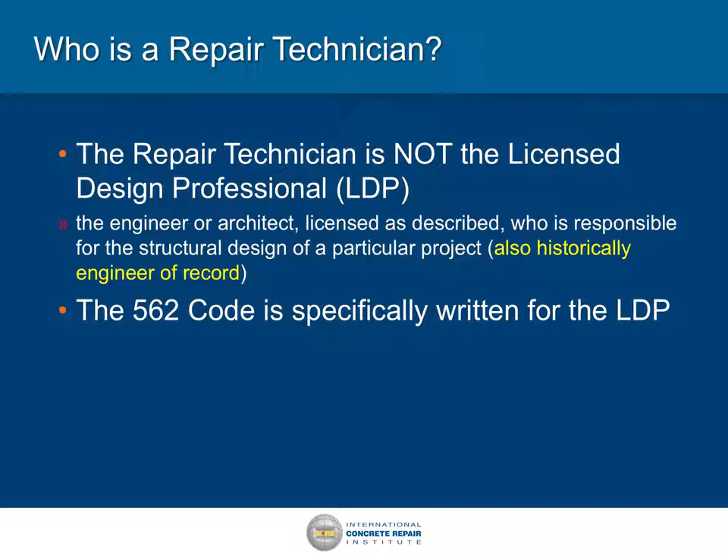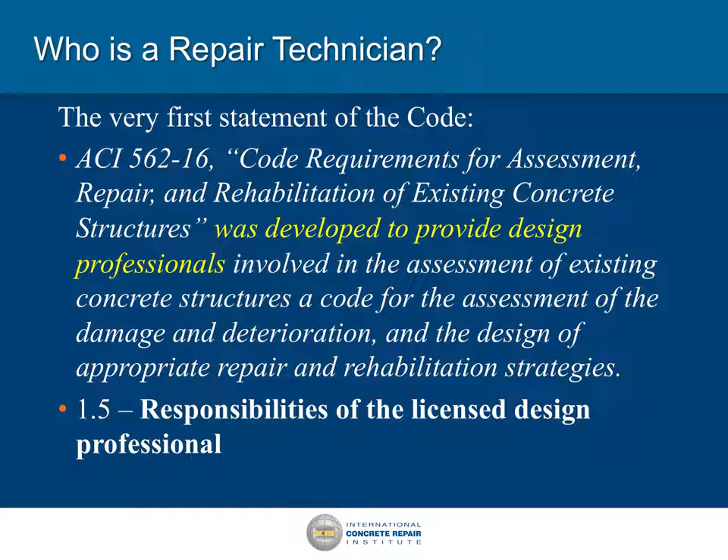In the code, just to reiterate what I said, in the very first page of the code, it specifically says that this code was to provide the design professionals guidance, not us as the repair people. So let's go farther. It also talks about the responsibility of the licensed design professional. I'll just go really quickly on what that is. It goes through all the listing of the licensed design professional. You see nothing in here about the construction and the quality assurance person.

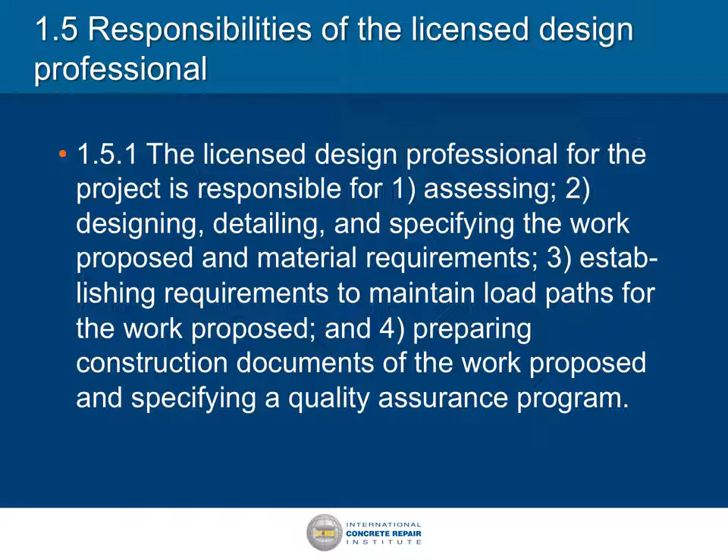So the commentary goes into it and says the quality of concrete repairs is largely dependent upon the workmanship during construction. So we're starting to see language in the code telling us why we've got to go here. And of course, it also says inspection is necessary to verify repairs and rehabilitation work are completed. Here again, just like in new construction, you wouldn't do new construction without quality assurance testing. So the commentary of the code is already guiding us towards the need for quality assurance.

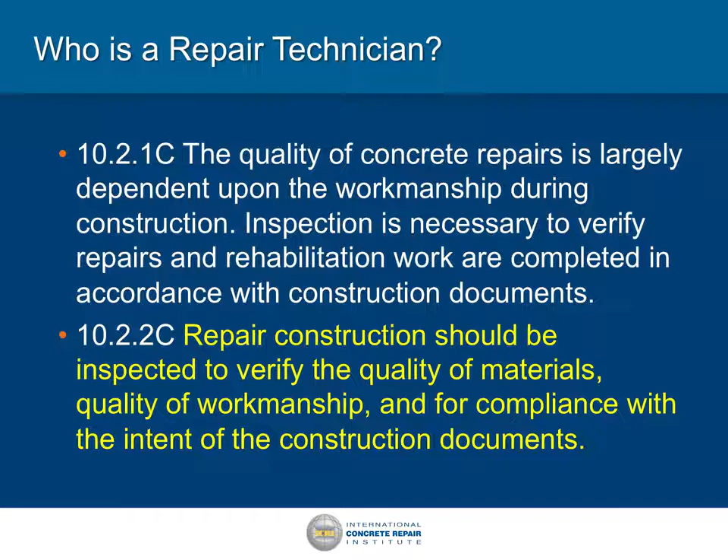So let's get a real definition of who the repair technician is. He or she is the qualified person to inspect the quality of the work. That's the person we're talking about. From the owner's side, that's the quality assurance inspector. From the contractor side, it's the quality control person. From the ACI-562 side, it's actually both of you. That's the certified person qualified to do the inspection. That's where we're going here.

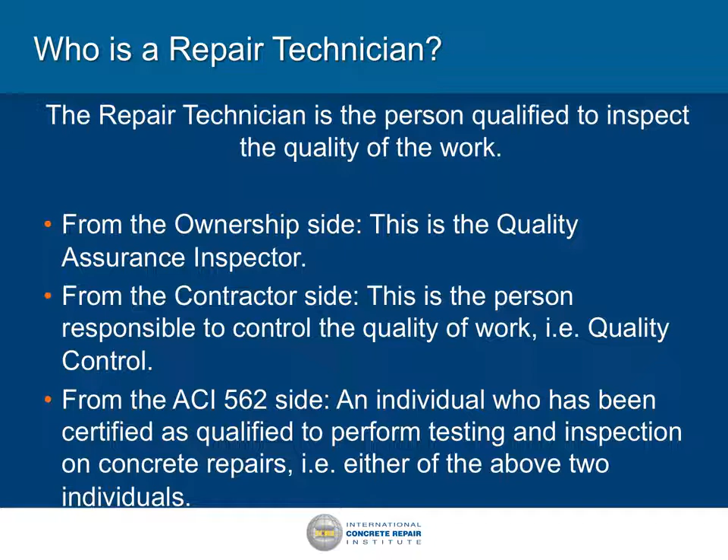Let's talk about the knowledge that the repair technician has to have. What does that individual need to know? We'll take a look at some examples. First, condition assessment—there's methods of assessment. The repair technician has to know the different methods. You're going to do a chain drag, you're going to do non-destructive testing, you're going to do other things. That's important to know. There's the chain drag—it has an ASTM standard. Still have to be familiar with it if you're going to do it correctly.

We have exploratory removal. All of us know how to take concrete out with jackhammers, but that's part of condition assessment. We have impact echo. How many here know impact echo? It's a technique, an important one. We have impulse response—I'm sure there'd be fewer hands for that. Thermography is a technique.

Now let's take a look at what the code says about it. In the commentary, it says the primary purpose of construction observation is to verify the exposed existing construction is as assumed in the design, and that the work detailed in the contract documents will fulfill the design intent. So that means this repair technician has to understand that—has to be knowledgeable about the design, why the design is being done, and what's being repaired. So the code is now talking to you as the repair technician.

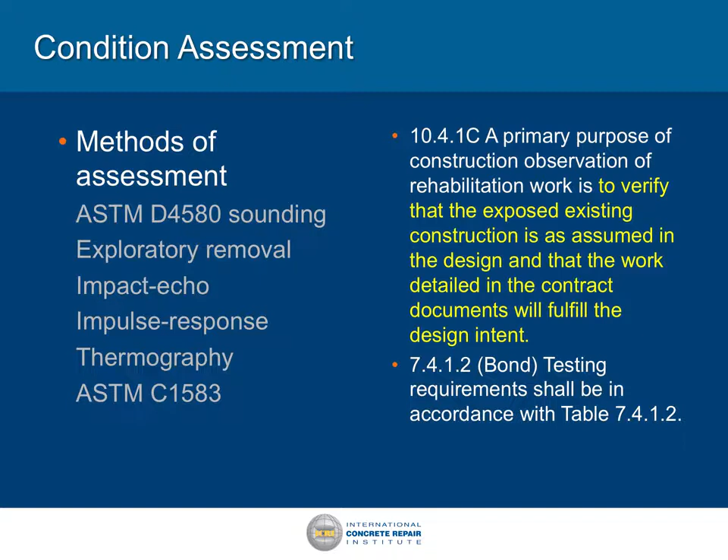Bond—as Keith said, bond is a primary thing. Just think of this: virtually everything we do in the repair world is related to bond. Everything. You do a surface repair, a vertical repair, an overhead repair, you do FRP—everything is related to bond. So the repair technician has to understand bond, and I'll talk a little bit more about it later, and has to understand ASTM C1583 for the bond testing. We'll talk some more about those later. All right, causes of the concrete deterioration.

There's embedded metal corrosion. I'm sure everybody would raise their hand if they understand embedded metal corrosion. But there's some other things: freeze-thaw damage, erosion and abrasion. One must understand these if one is going to be fixing it or inspecting the quality of the repair for that. Disintegration of concrete - what are the mechanisms that cause concrete to disintegrate?

Let's see what the code says about it. In section 1.7.4, I highlighted in yellow the effects of material deterioration and other deficiencies. Now that's talking to the licensed design professional, but it's also talking to the repair technician. You must understand this. If you don't understand it, you're not going to be understanding the repair. The knowledge of why a repair is being performed is absolutely imperative for understanding what's to be repaired.

What is being repaired in this building? How is it going on? So if you have that knowledge, you have the ability to observe if a repair is being completed correctly. That's the primary piece right here.

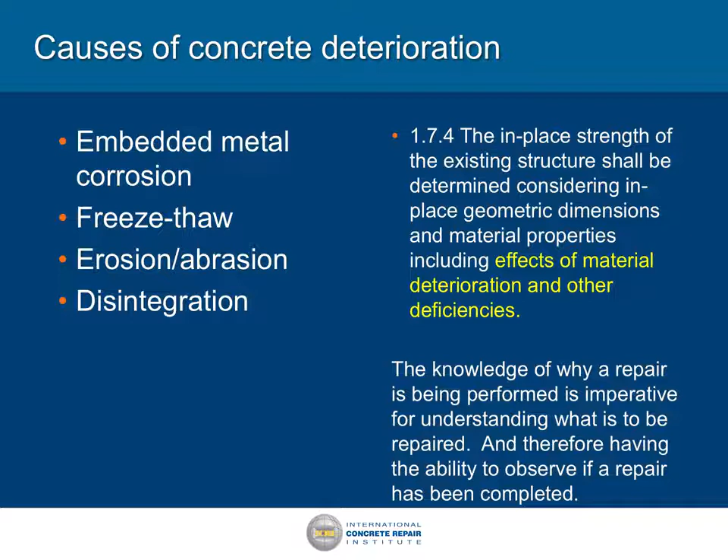Carbonation and chloride contamination - I assume you all know that chlorides are going to be detrimental, but you must understand that as the repair technician. So corrosion of the reinforcing steel can be initiated by either of those two. That's a whole seminar by itself, but the repair technician has to understand that.

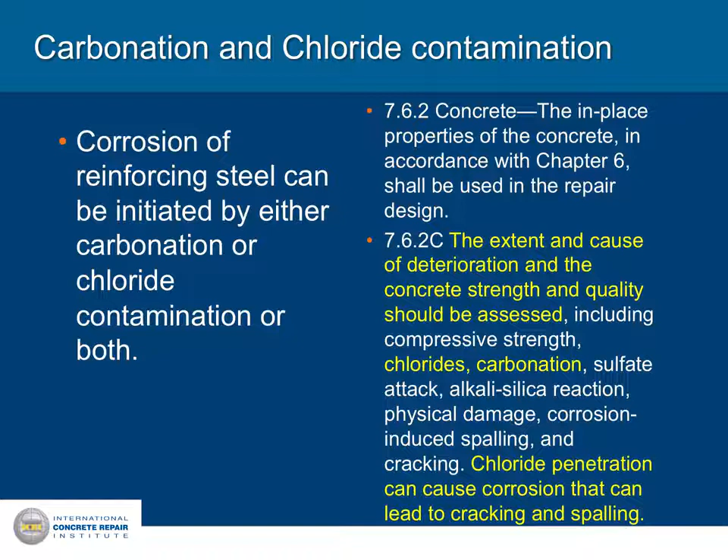Concrete removal - there's different ways of taking concrete out. But how many people here would know when I say a re-entrant corner can cause a crack? Very few hands came up. Okay, I got about a third of you.

All right, cracking can be detrimental. Of course, cracking can be okay too, but one has to understand the repair geometry in relation to cracking, in relation to the specifications. Of course, the licensed design professional also needs to know this because the licensed design professional has to be designing the correct repair geometry. But the repair technician has to understand that.

Undercutting of reinforcing steel - does a bar get undercut or does it not? What's the rules? Repair technician needs to understand that. And of course, the code is saying the repair geometry is important. That's, of course, talking to the licensed design professional, but here it's also talking to the repair technician.

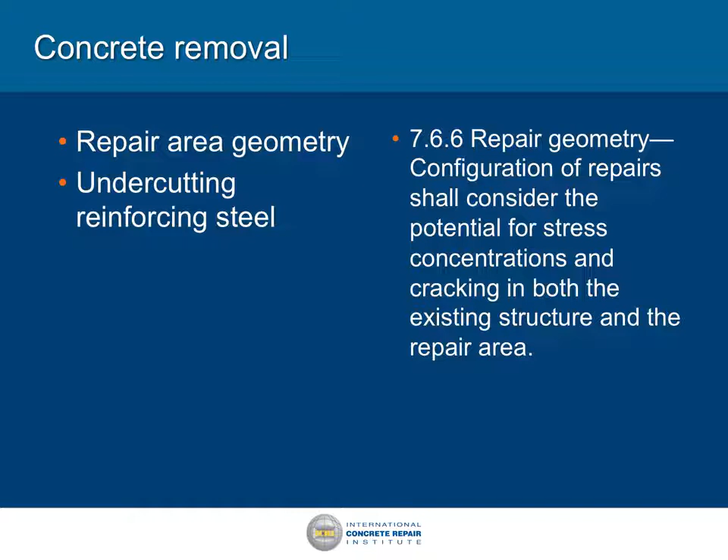More on concrete removal. In the code itself, it's specifically saying the shape of the repair should be considered to reduce stress concentrations and possible cracking. That's the piece that the repair technician has to understand. And it's also described in ICRI 310.1R, so there's plenty of guidance on learning about this.

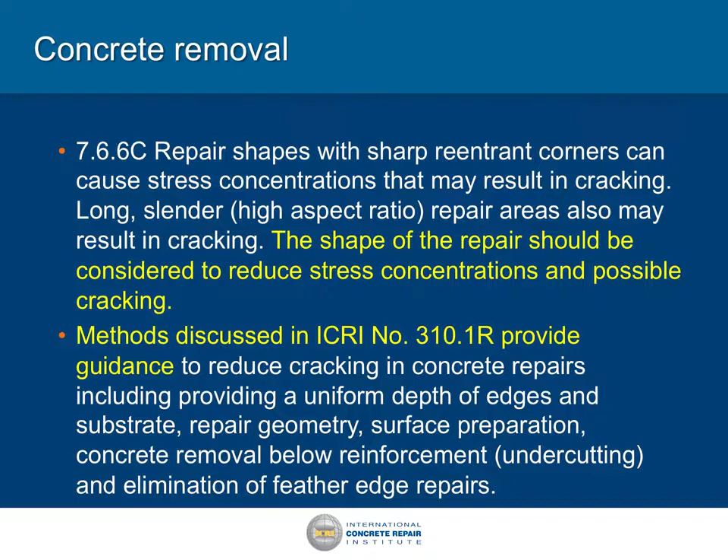Methods of removal - how do you actually take the concrete out? There's jackhammer, of course, hydrodemolition, and we've got the saw cutting on the perimeter. We have to understand all of these pieces so that you know, is it being done correctly?

The surface chips - how many engineers specify a specific surface profile using the surface chips? That's good, okay? Now the repair technician must also know that. So the repair technician has to know how to use those in order to verify has it been done correctly.

Bruising and microfractures affecting bond, another issue for the repair technician. The code on this specifically says required testing may include concrete removal and surface prep of the concrete and the reinforcement. So here's what the code is telling us as the repair technician, what the repair technician needs to be looking at.

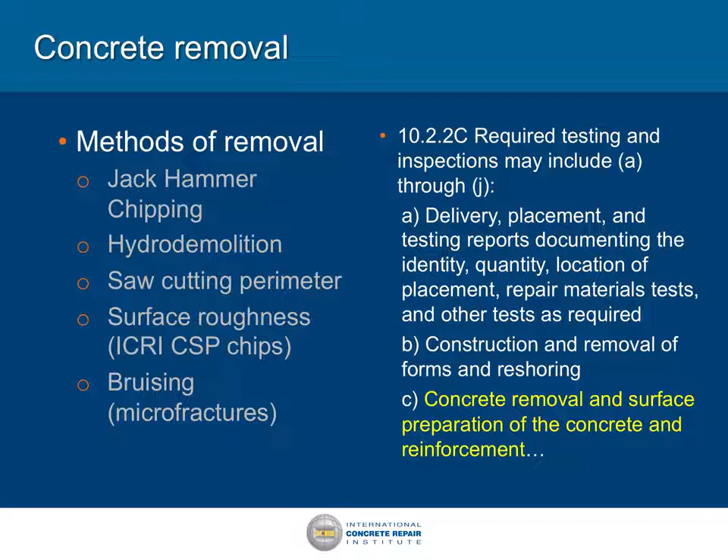All right, surface preparation. I just talked about the bruising. The cleanliness of the concrete - is it clean enough or is it not clean enough? What about temperature? Did we exceed our temperature limits? And how does one measure the temperature? And of course, moisture - what's surface saturated dry? That's a tough one, somewhat, because there's no real absolute standard on it, but that's often used as the specification. So the repair technician needs to understand all of these four things on the surface preparation. More on that, the commentary talks about mixing, placing, and curing of the repair materials.

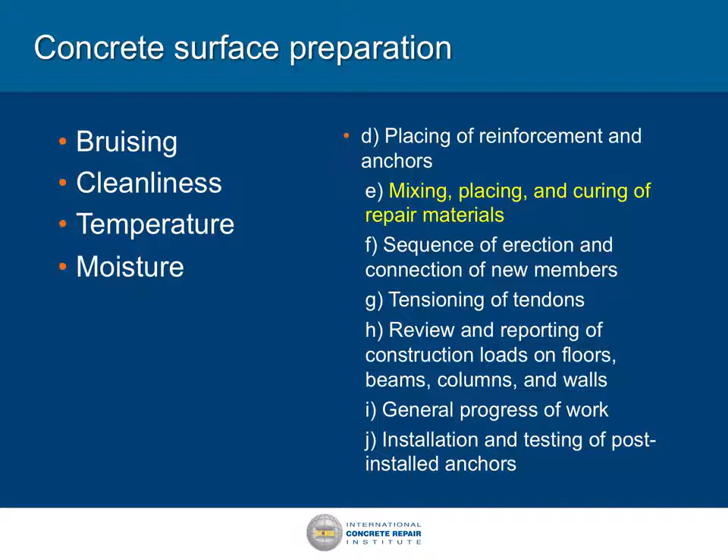All right, let's talk about the cementitious replacement material itself. Material selection - is it the right material? Okay, the licensed design professional, of course, is going to be specifying it. But the repair technician has to look at that stuff, and is it the right stuff? Okay, so the repair technician has to be very familiar with the material selection.

Compatibility. All right, the licensed design professional may have just said 4,000 PSI concrete. All right, but is that 4,000 PSI concrete that's being supplied for this job, with the additives in this concrete, is it compatible with the base concrete? Or did the contractor supply a bag material that's different? Is it compatible?

The code specifically says the design of the repair system shall consider the properties and installation of the repair materials and systems. That goes to the licensed design professional, but here's the key piece: the physical properties of the repair materials, and all the others that go along with it. So it's very important for the repair technician to understand the material that's going in place.

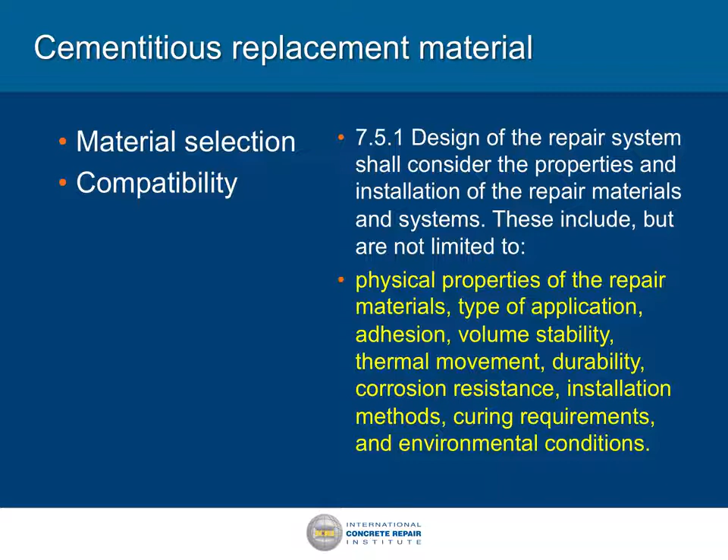All right, methods of placement. How do we put this stuff in the hole? There's dry packing. We've got all these different methods of placing concrete. Did the contractor choose the correct one for that application?

And of course, the code says the required testing and inspection may include delivery, placement, identity, quantity, and location of the placement. So here the code is telling the repair technician what he or she must be looking at during the construction.

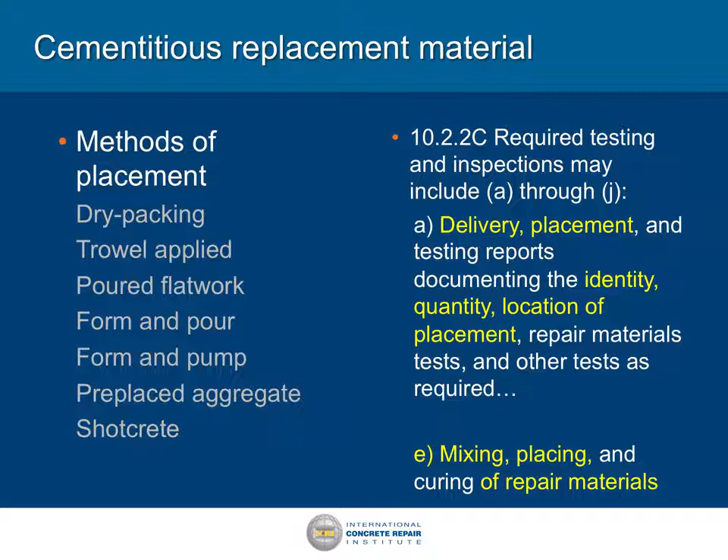Of course, there's mixing, placing of the repair materials. All right, let's talk about concrete curing.

There's methods of curing. Did the contractor do it correctly? Or how is it being done? Is it a curing compound? Are they doing an evaporation retarder? Is either one of them correct or incorrect? Burlap, you can use wet burlap. You can use polyethylene sheeting. There's a wet cure. Should that concrete have been cured by a wet cure method, or is another method okay?

Of course, the code talks about it. It says the required testing may include curing of the repair materials. So it's telling the licensed design professional that the professional has to specify it, but the repair technician has to understand which method is being used and is it the correct method that's being used.

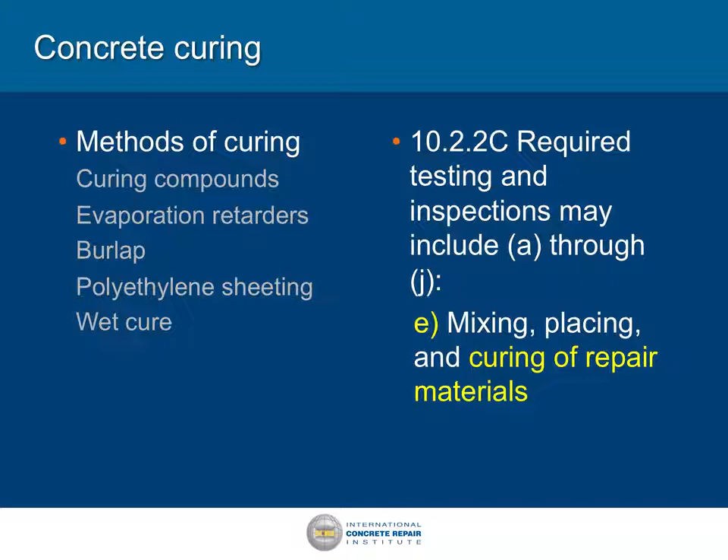Bond. As Keith said, bond is probably the hottest topic and the longest discussed topic of anything we did in the entire code when we put it together. Let's talk a little bit about bonding. We have mechanisms that affect the bond.

We talked about the surface chips. Is it the mechanical interlock between the concretes? Is the surface too smooth to get good bonding? Or is there bruising? A key piece in affecting bond. Did we get too many microfractures in the base concrete? The repair technician has to understand both of these, understand how to inspect for them, and make sure that the correct procedures have been followed and everything has been taken care of.

We have the ASTM D4580 for sounding. We'll talk about integrity. There's two pieces here, that there's either integrity or there's quantitative, where the code talks about these different levels. So I don't need to go into that part, but when the engineer or the licensed design professional specifies that it's going to be quantitative bonding, the repair technician is the person that's going to be doing it. When it's only specified to have integrity, we need to know how to do that.

Now, what's the difference between the two? Integrity is a yes/no question. You can do a chain drag on a repair, and it's either bonded or it's not bonded. It's a yes or no answer, okay? But how good is that bond? You don't know that. With a chain drag, you don't know that.

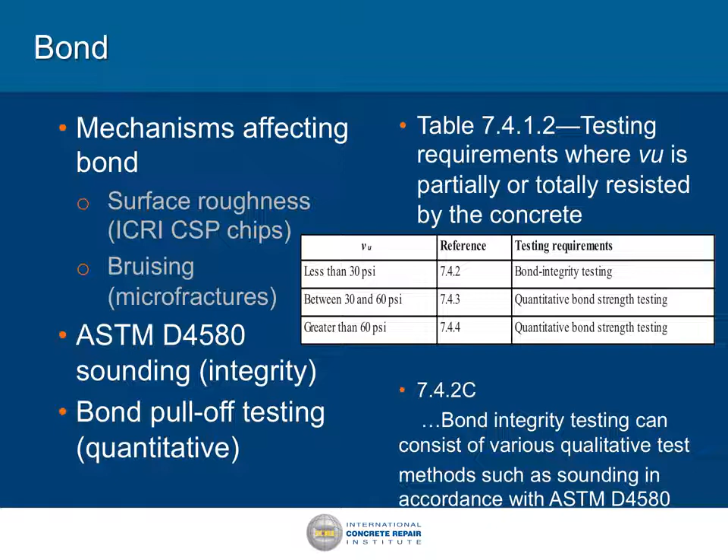And of course, in the commentary, it talks about how you do the testing. All right, a little bit more on the bond. We have the bond pull-off testing, as we just said. And here it is in the code, where the code tells you that the ASTM C1583, as described in ICRI 210.

Now, it's important to 210, because how many tests do you do? And where do you do them? I'm not going to go through all of that right now, but that's a key piece. You have to know how many tests. Now, it should be in the specifications where you're going to be doing and how much, but sometimes it may not be. So as a repair technician, you're going to need to know how many tests you're going to be doing and where you're going to be doing them.

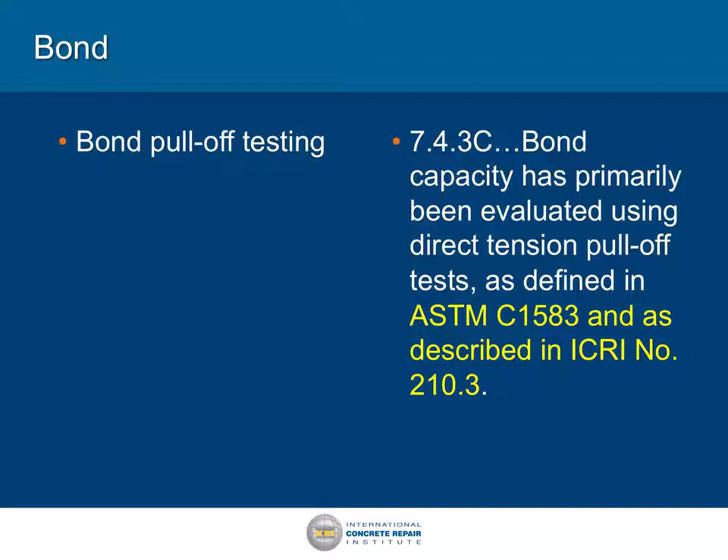Talk about the reinforcing steel corrosion. What is acceptable corrosion? How much can you have? How do you look for it? What's unacceptable corrosion? Now, yes, the licensed design professional has to have some guidance on it, but the repair technician has to know the stuff. When you're looking at the bar, when you see that rusting on the bar, when is that bar damaged? Is it damaged or is it not damaged?

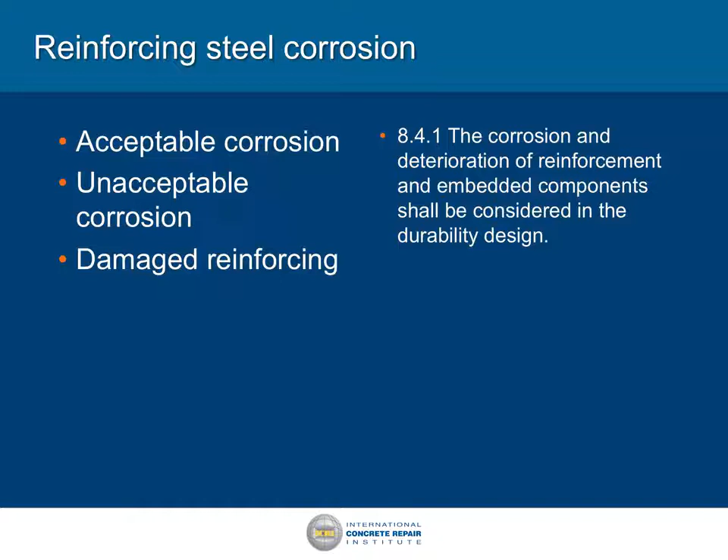So the code, of course, is talking about the corrosion and deterioration of the reinforcing steel being important in the durability. But the key piece is, it says the ICRI 310 provides guidance on removal of damaged concrete and cleanliness of the reinforcing steel. Those are key pieces that the repair technician has to understand. How many people in here have a good idea of how much corrosion can occur on a bar? If you're a certified repair technician, you have to know that.

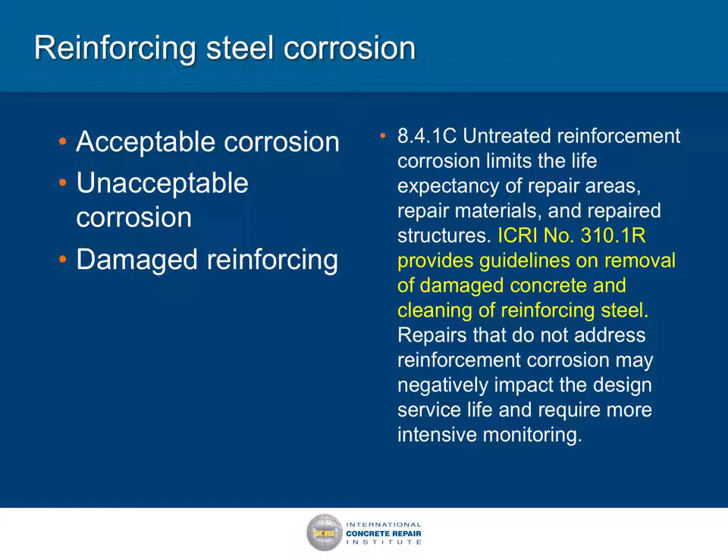Okay, a little bit more on the reinforcing steel. Calculation of the lost cross-sectional area. Show of hands, how many people can calculate the lost cross-sectional area? And how many of you are licensed design professionals? More hands than the first time. So what I'm showing you is even the licensed design professionals don't all know how to do it. But if you're out there in the field and the specifications say you can have 15%, 5%, or 10% loss of cross-sectional area, you better know how to do it. That's a key piece for the repair technician.

Of course, the code says reinforcement that is damaged or corroded shall be permitted to remain. So what that says is the licensed design professional is fully capable of saying in his or her spec, you can have 15% cross-sectional area loss before you have to put in extra bars. That the quality control has to check, quality assurance has to check. More from the commentary: the effective area is calculated using the remaining effective diameter of the reinforcing bar, accounting for the loss of section due to the corrosion. So that's given the licensed design professional the ability to say what is in the spec, but the repair technician has to understand that.

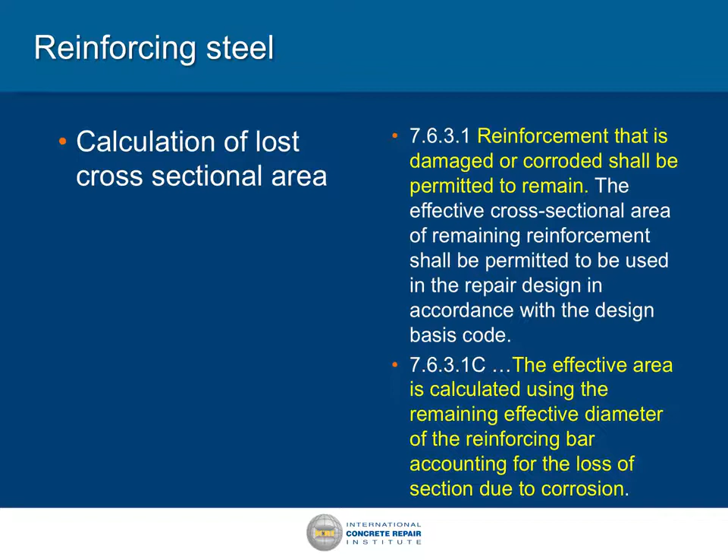More on reinforcing steel, the corrosion removal. How do we get that rust off the bar? Did we do it correctly? Did we use a wire wheel? Did we use hand techniques, or did we use sandblasting? What's the correct method of getting that specific corrosion off of the bar? Is it the right way?

Of course, the code is saying the corrosion and deterioration of reinforcing shall be considered in the durability design. So that means the licensed design professional took into account that we're trying to get a durable design. So the licensed design professional is telling you how much reinforcing has to be cleaned, and you have to be able to know that you've removed the correct amount. The commentary is also saying that untreated reinforcing limits the life expectancy. So you're controlling it by knowing, did you get the right amount of reinforcing steel cleaned? And ICRI provides guidance. Another key piece to understand, 310.

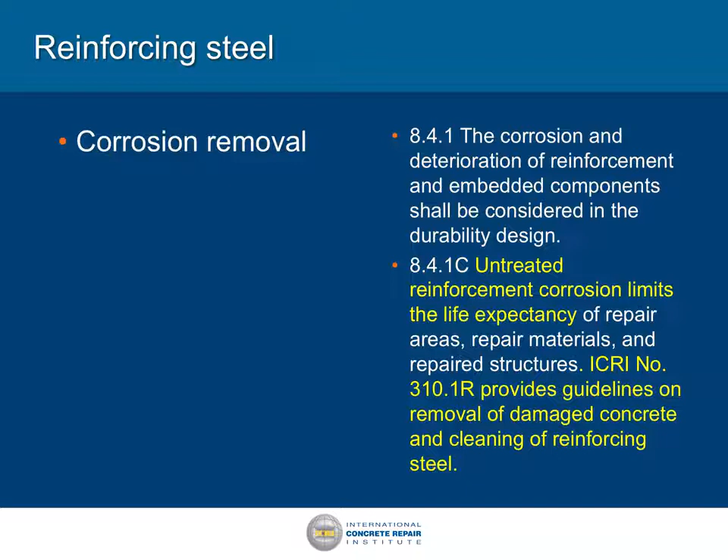More on the reinforcing steel, concrete cover. I suspect if I asked how many people know what the cover is, just about everybody would probably put their hand up. But it's an important piece. You must be able to know how to measure the concrete cover over the bar, and that's about the corrosion protection.

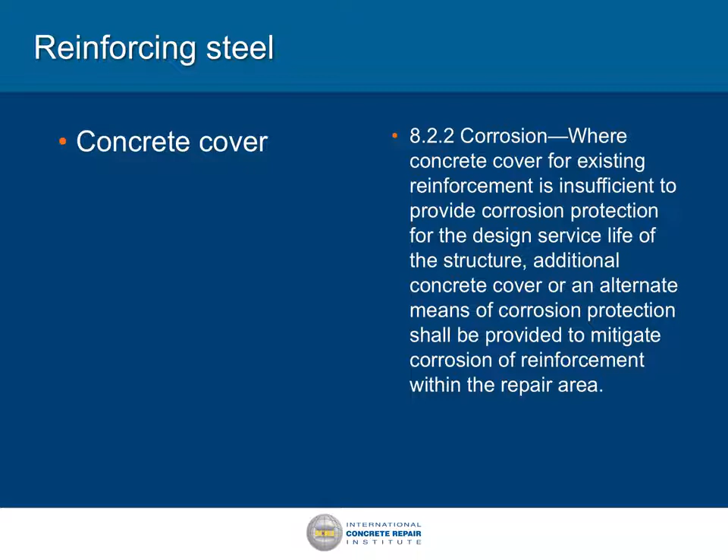Let's talk about the replacement. Development length. If I ask the engineers in the room, every one of you should know what development length is. But I have to ask the contractors in the room, how many of you know what development length is? Okay, there's only a few of you that know. I'm not going to go into it, but it's a key piece. You must understand when you're putting in a new reinforcing bar, how far that bar is into the concrete to know that it's been developed. The engineer of record will specify for you your development length, but you need to know how to measure it.

Same thing with the lap length. That's a little bit easier, but you must know how to measure the lap length, bar size, and the strength of the bar. There's alternate methods of splicing. What if we can't get the correct lap length and they choose to use a mechanical splice or a welded splice? Is it the correct splicing material? Did they get the right piece that can take care of the amount of lap length that should have been there? And of course, the code is saying the construction documents should include size, configuration, and reinforcing. I mean, that's a no-brainer. And here it says specifically development length of the reinforcing and the length of your lap splices. So those are important pieces for the engineer, and it's important pieces for the repair technician.

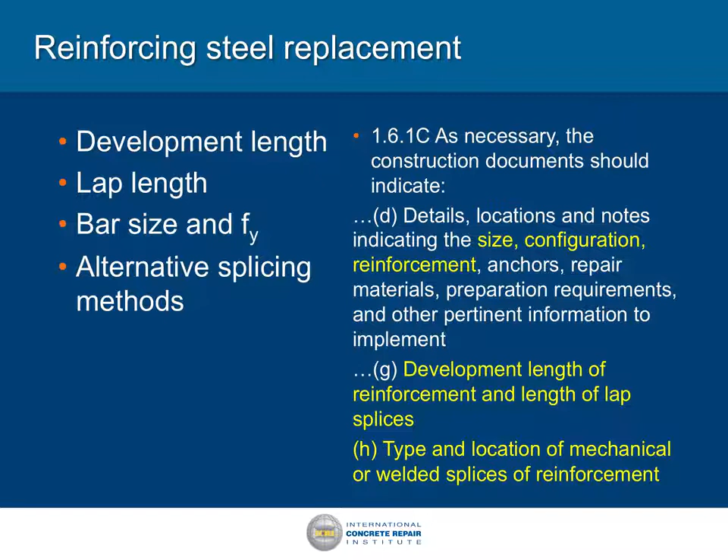Let's talk about the testing. Specific testing. Repair technician has to know about ASTM 1583. We just talked about that on the bond testing.

Slump. Now, 318 and 562 are very similar in some of the testing. If you do new construction, would you ever think of doing it without measuring your slump? Well, if you're doing repair and using that same concrete, why aren't you measuring your slump? So some engineers will be specifying it. In self-consolidating concrete, it's that spread. But it's the same test, everybody needs to know how to do that if you're a repair technician. And of course, your concrete test specimens, in new construction again you wouldn't think of doing it without taking test cylinders. So why would you be doing repair without taking test cylinders? Repair technician needs to know this.

The commentary in the code says, of course, the repair construction should be inspected to verify the quality of materials and quality of workmanship. So it's talking to the repair technician, although it's intended for the licensed design professional too.

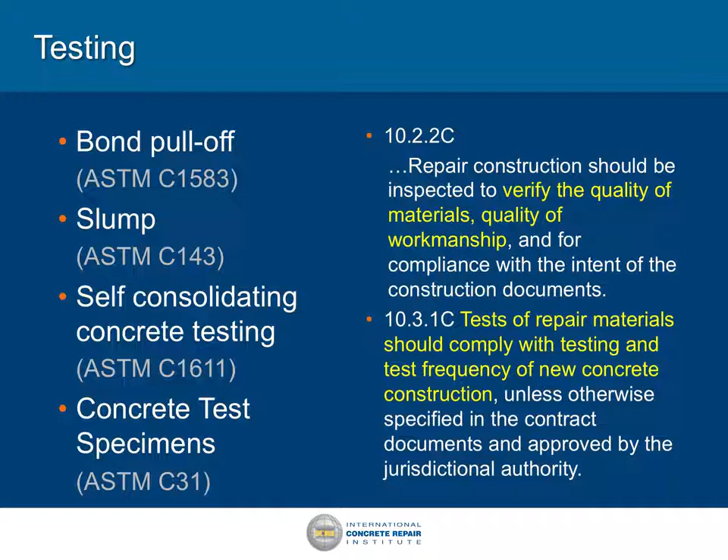Tests of the repair material should comply with testing and frequency of new construction. Now that's a commentary, not a code requirement. But it's still pointing to you, saying if you're going to do new concrete, you should be testing your new concrete just like you would in a new building.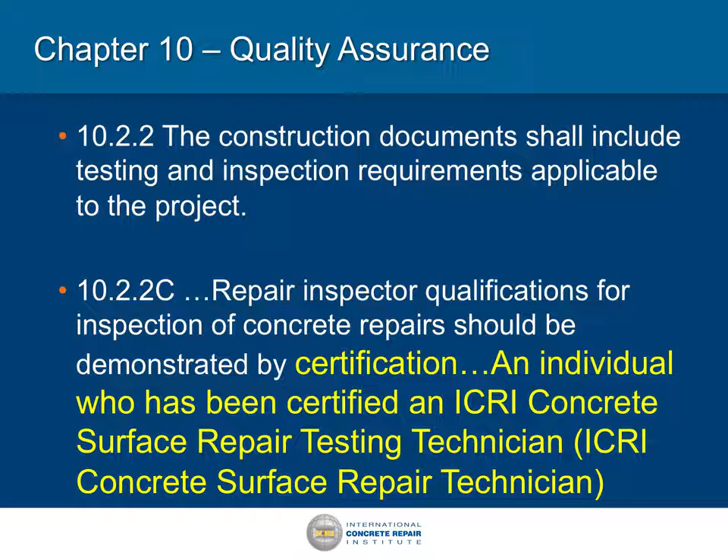The commentary specifically says demonstrated by certification, mentioning ICRI specifically. There's one other reference, the ACI 306, but that's really a reference for new construction—it doesn't really talk about concrete repair. The only thing it talks about for concrete repair is the ICRI certification program, and that's what we just defined. I just went through with you, defining for you, the ICRI Surface Repair Technician program.

So for those of you in quality control, quality assurance, here's how you can learn. There's something else that's very interesting, and I'll show you what's in the program in a minute.

How many of you are first-timers here? Okay. How many of you are new to concrete repair? Okay. How many of you are employers? And those employers get new employees occasionally who want to learn in this industry.

If you send them to this program or have them do this program, you learn an awful lot about concrete repair in a very, very short period of time. So there's another sidebar here to the certification program—you can learn an awful lot about this industry if you do the certification program.

It's 8 hours long for the first tier. There are 2 tiers to it. So I'll briefly tell you about what the program is. The first tier consists of 5 training modules. Now, there's been some other seminars really going into the full program, and I'm not going to talk about the full program. But there's 2 tiers, and that first tier gives you a certificate of achievement. That's not the full certification, but it's 8 hours long.

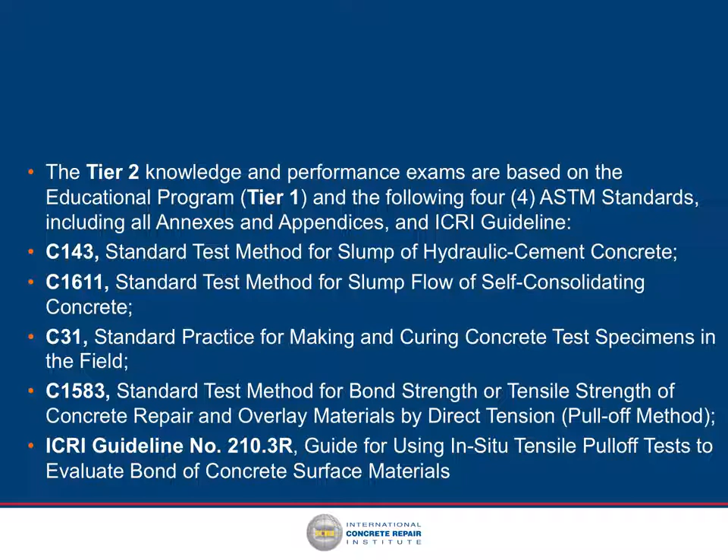So as I said, the second tier has the knowledge exam of the first, and then that performance, which is the live video. So here are the 4 tests that you need to do, and you need to do those again, either live or as a video.

So who is the repair technician? It's not the licensed design professional, as we said. It's the ICRI certified concrete repair technician. That's who the repair technician is.